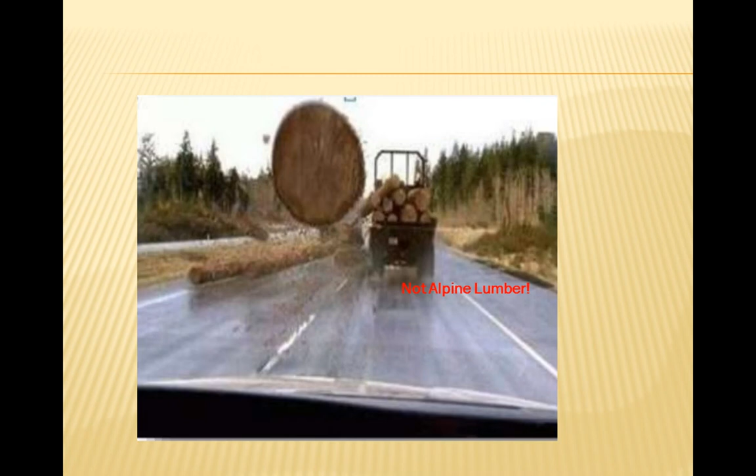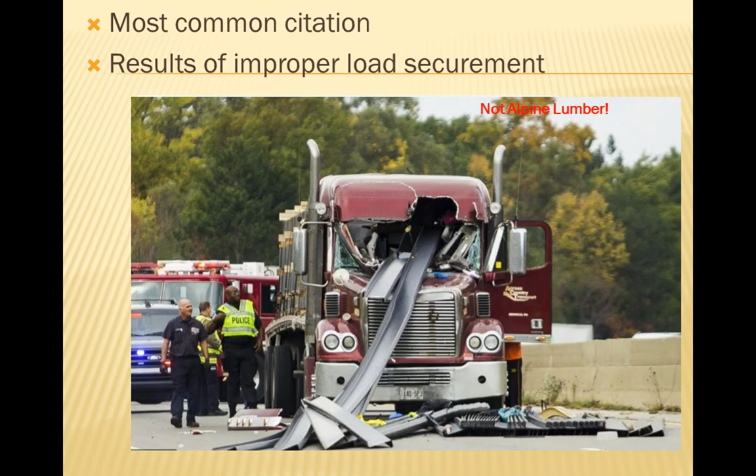Cargo securement is a constant concern for Alpine Lumber and all commercial vehicle drivers hauling loads on public roads. Improper load securement is the most common citation for Alpine Lumber. Improper load securement can result in fatalities or injury to other drivers, serious damage to other vehicles, and citations and fines for the driver and Alpine Lumber. It's important that you understand load securement and, as a professional driver, you do your best to get it right every time.

You're expected to have your cargo secured under all conditions that could reasonably be expected to occur in normal driving. This includes all freight and all equipment carried for vehicle operations. Anything that could come loose and become a projectile while driving. Don't forget to secure your fire extinguishers located in the cab of your vehicle. Secure your tailgates, your ratchet bar, the list goes on.

The Department of Transportation, or DOT, load securement rules apply to all commercial motor vehicles, including box trucks. Here's what DOT says. When securing cargo, the use of a tie-down every 10 linear feet or fraction thereof is adequate as long as the aggregate strength of the tie-down is equal to at least half the weight of the article, and the load is secured to prevent it from shifting or falling from the vehicle. Loose hardware and other job-related material must be secured in both the box and the cab of the vehicle.

What does this mean? It means you can't use a tie-down rated at 50 pounds on a 110-pound, 10-foot-long object. You'd need at least 2 tie-downs, or you'd need a tie-down rated at 55 pounds, which is half the 110 pounds that the object weighs.

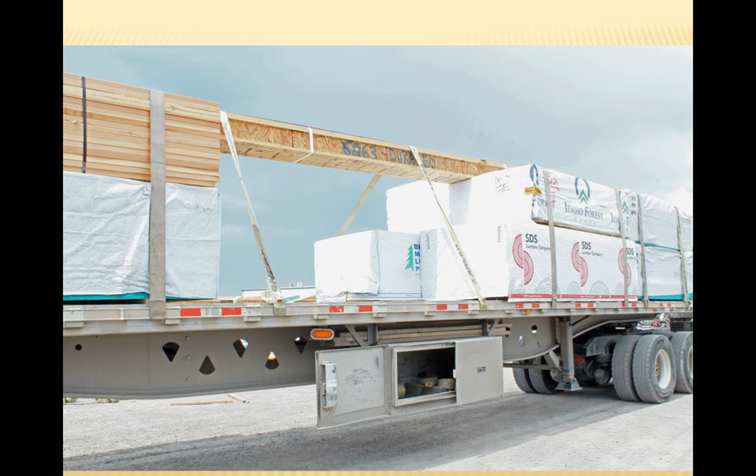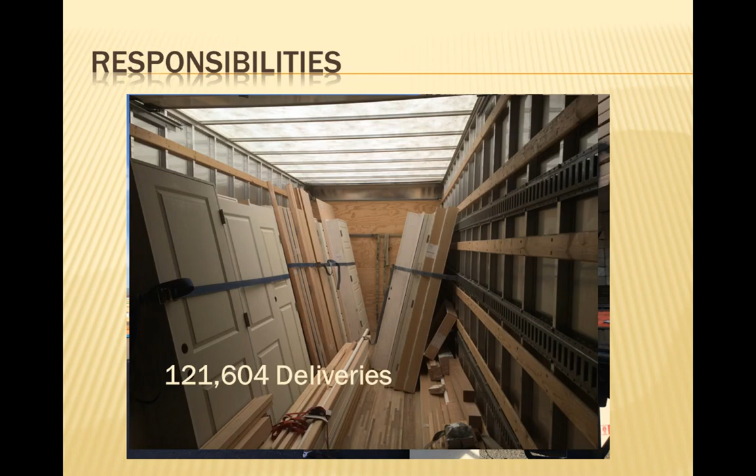Alpine Lumber drivers drove over 2 million miles in 2018, with about 170 drivers. While some drivers travel greater distances than others, the average Alpine Lumber driver will drive around 54 miles per day. In 2018, we made 121,604 deliveries. You, Alpine Lumber drivers, spend a lot of time on mountain roads, city streets, highways, tight residential areas, and in front of the public. You have a responsibility to yourself, to Alpine Lumber, and to the public to ensure your loads are secure.

Even though loaders and forklift operators might be doing the work before the load is secured, drivers are expected to know your axle weights, limits on the highways versus back roads, height restrictions. Ultimately, drivers have a huge responsibility as professionals on U.S. roads.

For those of you new to Alpine Lumber, we have a safety program called Safety Alerts, and it's helped us to improve our safety. Safety alerts are a way to discuss events that cause injury or property damage throughout the company. We try to determine how we can learn from each other's mistakes and come up with a better way of doing things. During this training, we'll go over several safety alerts related to load securement. If we strive for continuous improvement, even small changes can make big differences. Just like you, Alpine Lumber wants you to go home safe to your families every night.

So this first lessons learned comes from Eagle, where the material was loaded by someone other than the driver, and the driver drove off without inspecting his load securement. The material flew off as the driver went through a roundabout not far from the yard. No one was injured, but they had to order new doors because of damage. This cost Alpine Lumber time and money, and probably irritated the customer that they were now on hold for their doors. We were lucky. This could have been a lot worse.

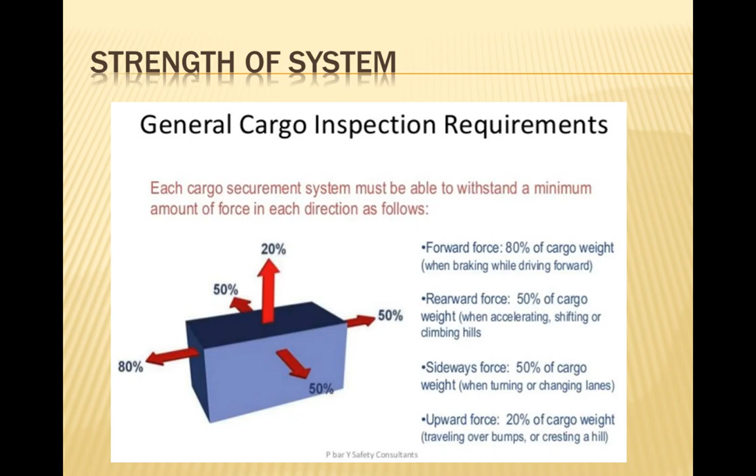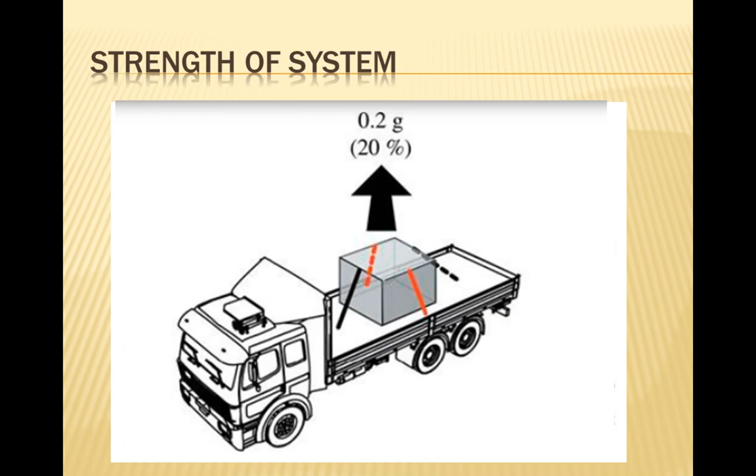To counteract movement to one side, attach the tie down so it pulls the cargo toward the opposite side of the vehicle. To counteract upward movement, attach tie downs to opposing sides of the cargo. If you have any issues with the anchor points or the structure of the vehicle, you must get it resolved before loading the truck.

DOT uses the words secured and immobilized. What does that mean? It means that your cargo is attached and secured in a manner that prevents it becoming loose, unfastening, or releasing while the vehicle is in transit.

At Alpine Lumber, we use web slings as tie downs. Tie downs must have the ability to be tightened and in good working order. Web slings must have no knots or obvious damage, no distress, no weakened parts. It must be attached and secured so that it does not become loose or unfastened during transit.

The driver was fortunate that the material didn't fall toward him, which is a possibility when strap dumping. Always ask for new straps if you have the slightest concern. A strap is much cheaper than trying to fix an injured person or customer's property.

Web sling tie downs have a working load limit stitched into the strap. The straps we use at Alpine Lumber have a working load limit of 5,400 pounds. If you can't read the working load limit of the strap you're using, it probably needs to be replaced. The minimum working load limit for the system is 50% of the weight of the load. That means each strap is available for 10,800 pounds. But don't push it. Use more straps than you need.

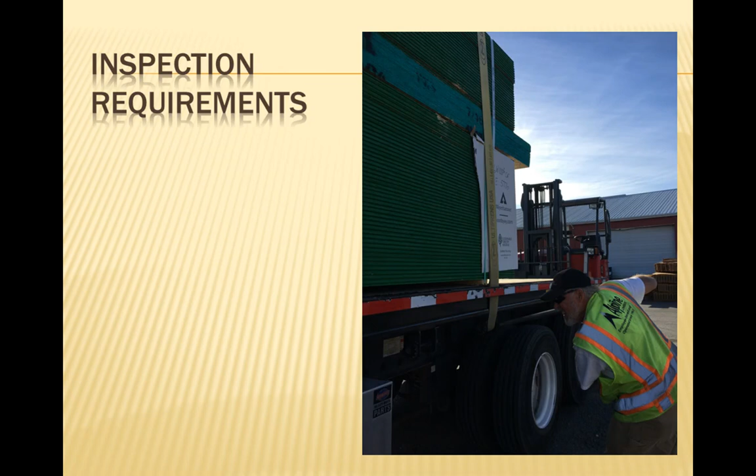We just heard about a driver who thought his strap was bad but would do okay, and then it failed on him. Learn from this. It's important that you take your inspections seriously. These are large, heavy loads, and you have a lot in your hands. Everyone's in a hurry to get on the road, but if you take a few extra minutes up front, it will save you a lot of time and headaches, maybe injuries and lawsuits down the road.

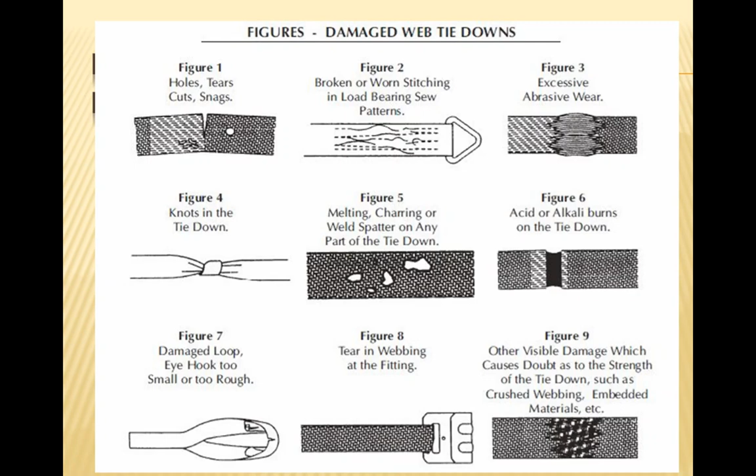Alpine Lumber expects you to be a professional driver. Take a minute to review this damaged web tie-downs diagram. DOT says if a rub rail is available, tie downs and all components of a cargo system must be located inside that rub rail. This is a federal rule.

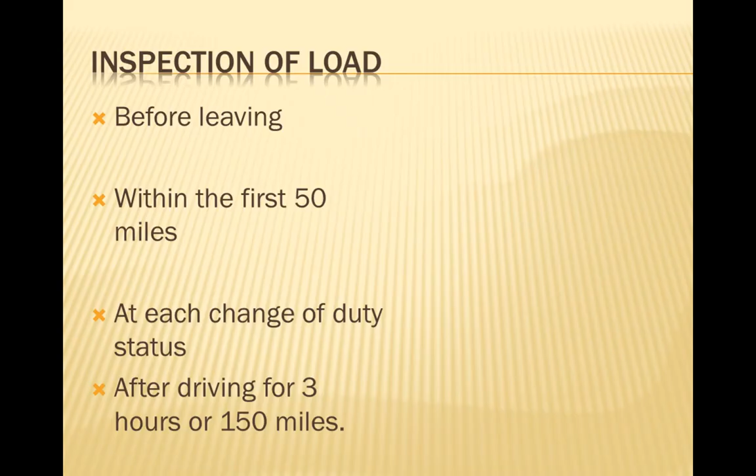Drivers are required by the Department of Transportation to re-examine their cargo and its load securement devices during the course of transportation, and they must make any necessary adjustments to the cargo or load securement devices, including adding more securement devices. So when do the federal rules say you must inspect the load securement and make changes?

First, and obviously, before leaving the yard. Then, within the first 50 miles of travel. Finally, drivers must check the load securement again when one of the 3 following events occurs: either the driver makes a change of his duty status, or after driving for 3 hours, or after 150 miles, whichever occurs first.

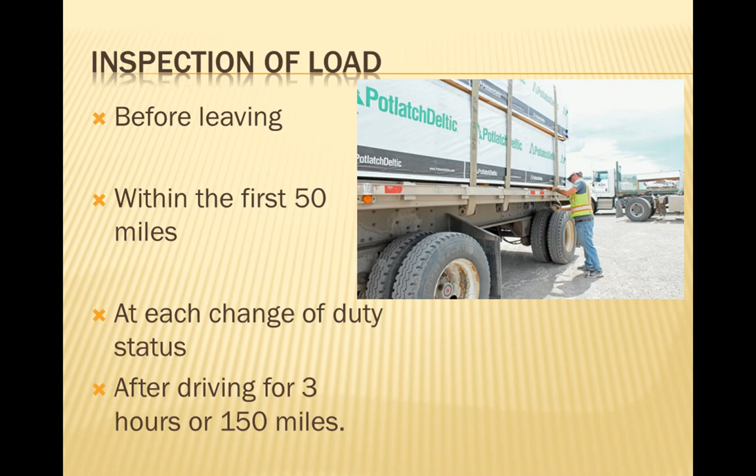For a third safety alert lessons learned, the Alpine Lumber driver was heading westbound on I-76 in heavy traffic. The winds were blowing and the driver was carrying a load that consisted of siding material. A gust of wind caught the end of one piece of siding and tore it off. This broken piece landed on the hood of the pickup behind the Alpine Lumber truck.

We're fortunate it wasn't a motorcycle or someone in a convertible with the top down. Adding an extra strap to the load would have taken less time than the time it took to manage the incident, plus the cost of fixing the hood of this truck.

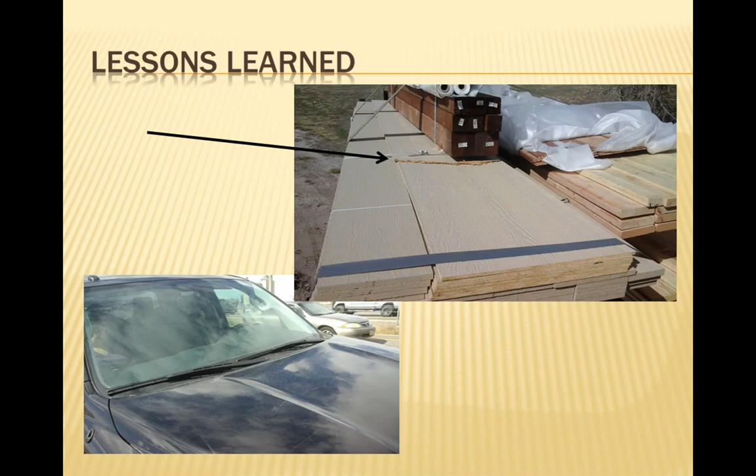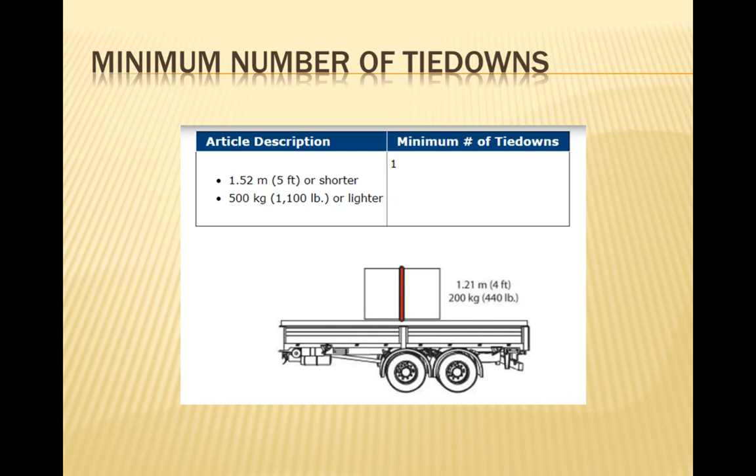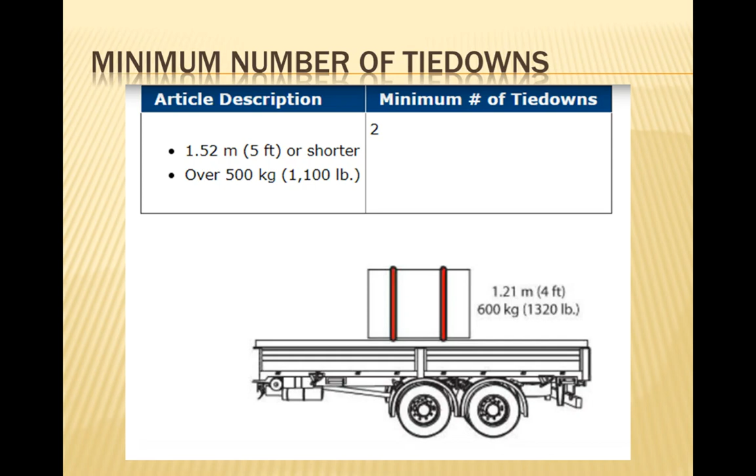There must be 1 strap for units 5 feet or less in length, weighing 1,100 pounds or less, and 2 straps if the unit is 5 feet or less in length, but it weighs more than 1,100 pounds. At Alpine Lumber, you can plan on at least 2 straps for every load. From 5 feet to 10 feet, you must have 2 tie-downs regardless of the weight. The image shown here is 12 feet long, which requires 3 straps.

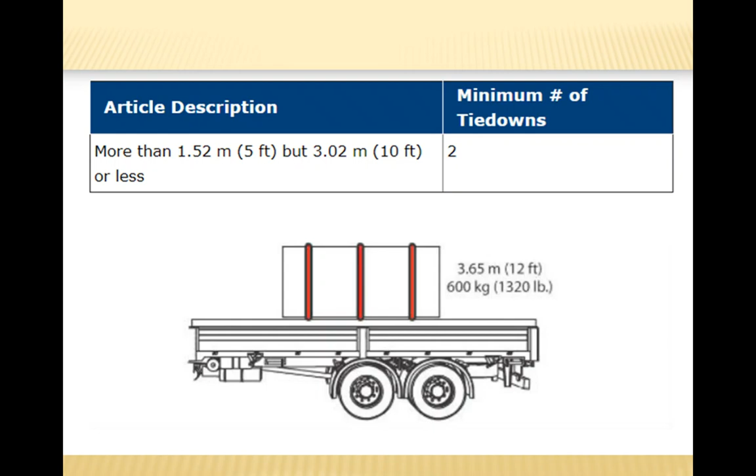Anything over 10 feet will require a minimum of 3 straps. 2 straps for the first 10 feet and 1 more strap for every additional 10 feet or portion of 10 feet. So an 11-foot item will require 3 straps. A 21-foot item will require 4 straps.

If you're stopped by a state trooper, you need to be knowledgeable on the rules for minimum tie-downs, and you need to know the length of your load. In the end, it's best not to argue and just add another strap if requested.

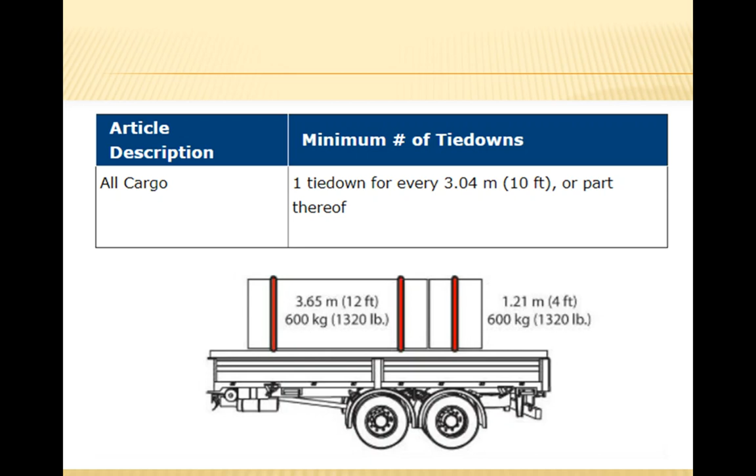If you haven't worked for a lumber company before, know that the Federal Motor Carrier Safety Administration has special rules for lumber and building materials cargo loading. Units must always be placed against each other to prevent movement from side to side. If you cannot place the bundles touching, you must use blocking or dunnage between them.

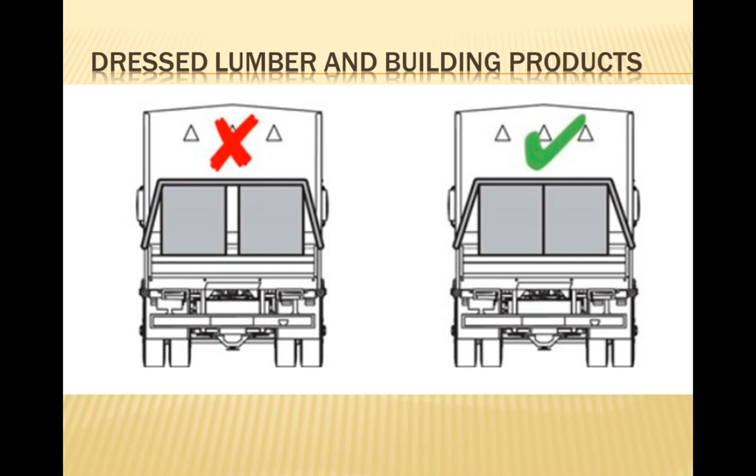Here are the rules for Alpine Lumber cargo loading box trucks. Doors should be loaded no more than 5 wide in a pyramid shape against the wall of the truck. That is, doors should be layered to form a pyramid shape leaning against the wall. Doors may be loaded as deep as will fit in the truck, so long as it allows for the securement device. Ensure the weight is balanced evenly between the 2 sides of the truck.

If the truck is unloaded, leaving doors and trim pack on one side, the doors must be moved to the other side for balance. Straps must not be so tight as to damage the product. Drivers are expected to check straps before leaving to ensure they're tight enough to withstand movement. Helpers are generally on these trucks. If no helper is available and a driver notices he has a heavy load, he must stop and request a helper. Exterior doors are very heavy, and a helper will be required for these loads.

As you heard earlier, Alpine Lumber employee owners drive a lot of miles. 20 violations may not seem like a huge deal, but each of them had the potential to result in a serious accident or failure of the load to stay securely on the truck. 18 out-of-service violations means the driver could not continue onto the delivery without first correcting the problem 18 times. If an extra strap had been added in the beginning or the load had been checked in the first 50 miles and corrected then, these drivers wouldn't have gotten the violation.

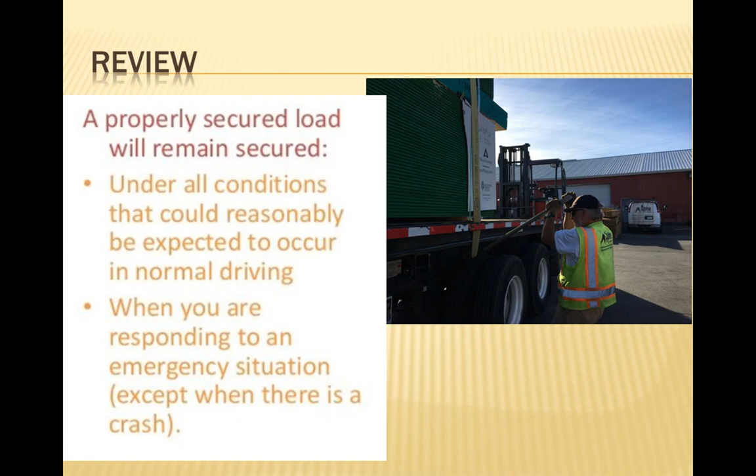Alpine Lumber wants you to secure your load correctly. Consider every load as if your own families were behind the vehicle that you're driving. Treat every trip as if you're going to pass through a port for a full inspection every time you get in the truck. Alpine Lumber expects you to take responsibility for your truck, your loads, and your deliveries as professional drivers. It's understood that there is pressure on all employee owners to keep work moving and get the job done, but not at the expense of safety. Don't be this guy. No delivery is worth it.

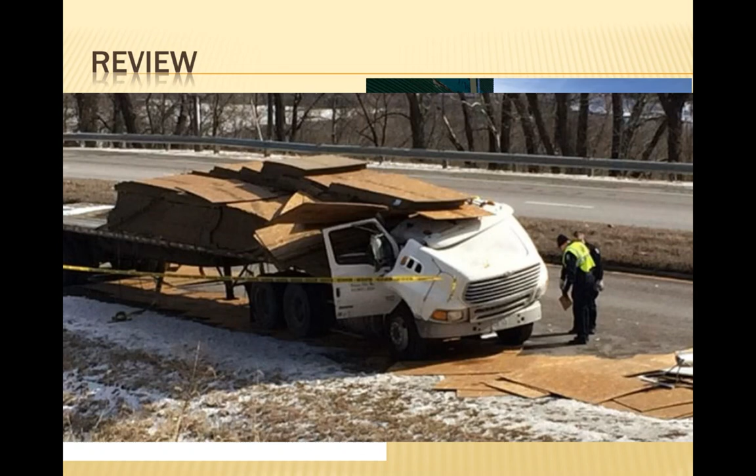You're required to take and pass a load securement test prior to driving on your own. Please review the policy prior to taking the exam. Load securement is serious. Alpine Lumber drivers who receive a citation for improper load securement may be subject to disciplinary action. Repeat offenses or negligent cargo securement may be cause for termination, and drivers may be personally responsible for paying any fine associated with the citation.

Don't be afraid to talk to your manager or supervisor if you're unsure about a load. Everyone has questions or concerns at some point in their career. We've all had more than enough safety alerts and would like drivers to stop taking unnecessary risks. Talk to a seasoned driver that you can trust to give you some information. You can call me, Lan Berry, the safety manager, for further assistance.